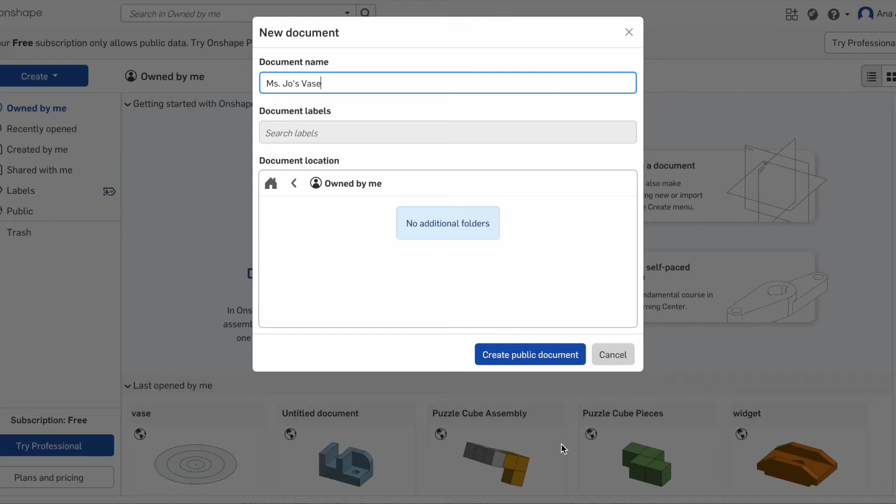Hello everyone, this is Miss Jo and we're going to make a vase using the Loft tool.

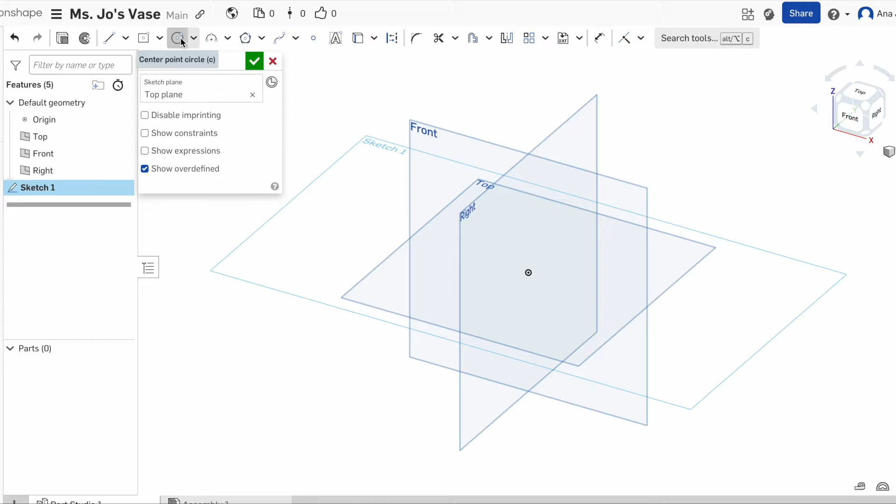So go ahead and start a new Onshape document and just call it my vase, and it'll open up your first little planes. Basically this is just going to be the same process over and over again. You're going to make a sketch on your top plane, and I'm going to start with a center point circle. I'm going to look at my top and make a circle. It looks great, and I'm going to check that off. I'm going to put it back in the isometric view.

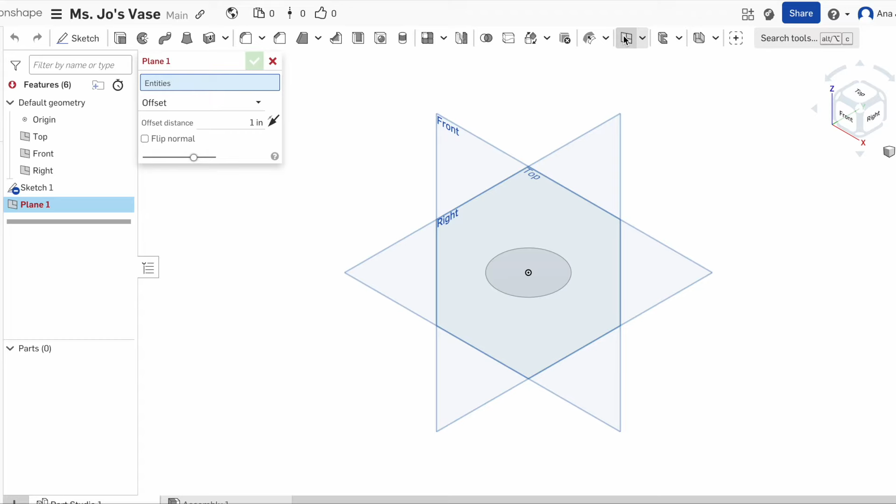So the next thing you have to do is make a plane that is offset, or above, this top plane. So you're going to look right here for the plane tool. You can click down, maybe it's not set, but it should default to the plane tool. When you do that, you're not going to see a green check mark until you tell it which plane you want to offset your plane from. So choose the top plane, and then here you can decide what distance you want.

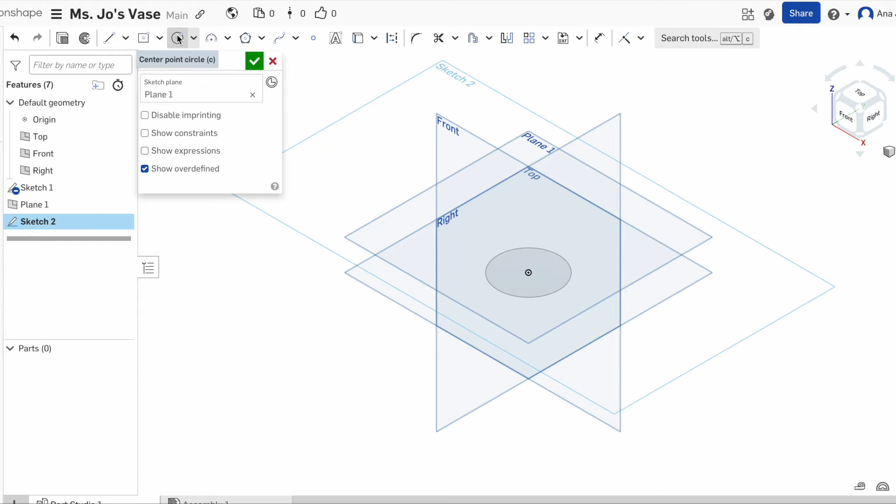I'm just going to make mine 1 inch above the top plane, and then I'm going to make a new sketch, and this new sketch is going to be on plane 1, and you can choose any shape. I'm just going to choose another center point circle. I'm going to look in my top view and make another circle, and this one I kind of want my vase to go a little out before it goes in. So I'm going to make a circle that's bigger than that. Click on the check mark. And if I look at this, you'll see that I have my 2 circles.

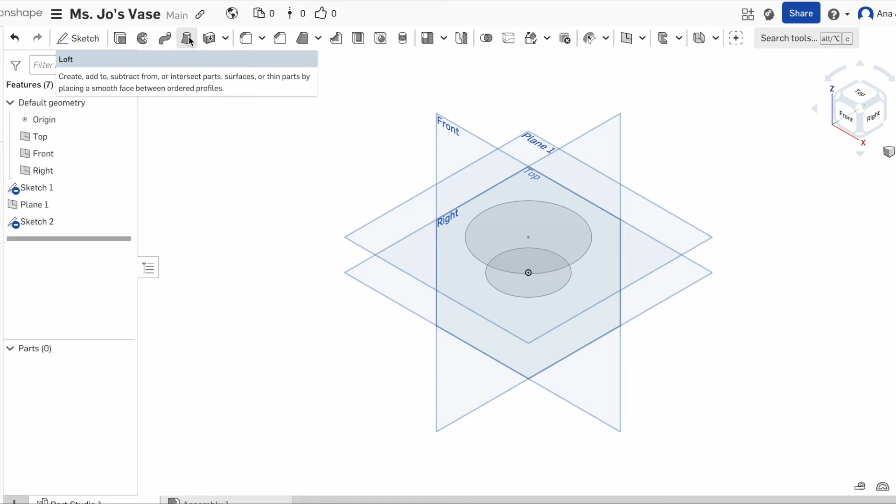So now is when we can use the Loft tool. The Loft tool is right here, and what it does is it will connect any 2 shapes. So I'm going to click that, and I'm going to first select my first circle and then my second circle, and you can see that it connects those 2 shapes. So that's the bottom part of my vase.

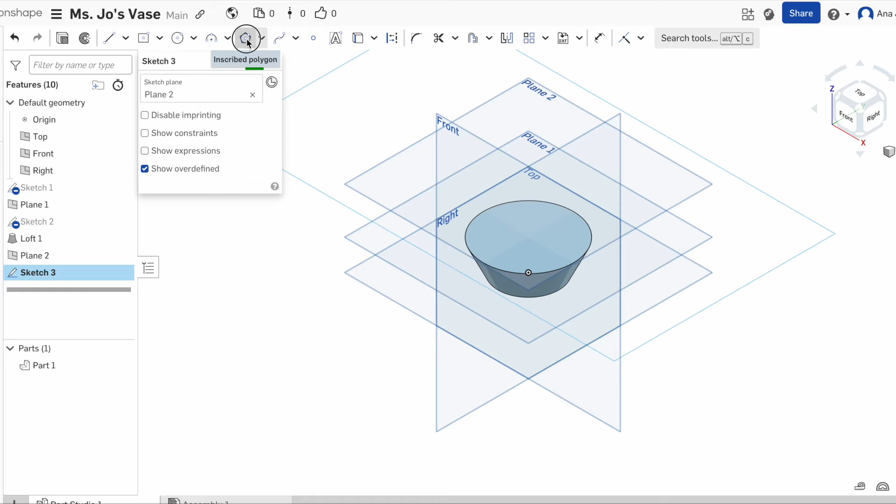Now I'm going to make another plane, and I want my plane to be above plane 1. I'm just going to do another inch and then press the check mark. This time I'm going to make a sketch, but now it's going to be on plane 2. I'm going to choose my inscribed polygon, and I look at the top view. I'm just going to make a polygon, make it smaller, and you can change the number. I'm going to make mine a hexagon with 6 sides, and then you press the check mark. Go back to the isometric view.

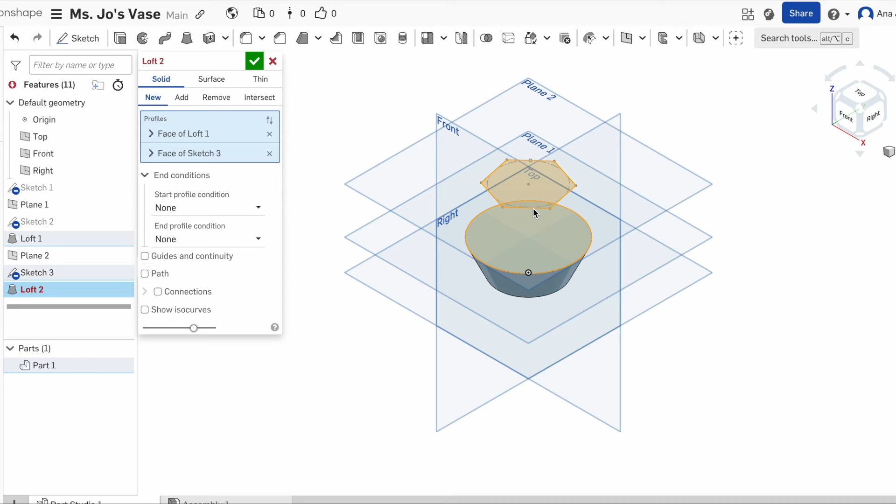Oops, not that one. Now I'm going to loft. You might think, oh, well, those aren't the same shape, how is it going to loft? But Onshape will loft them the best that they can. So it looks like that. I'm going to press the check mark.

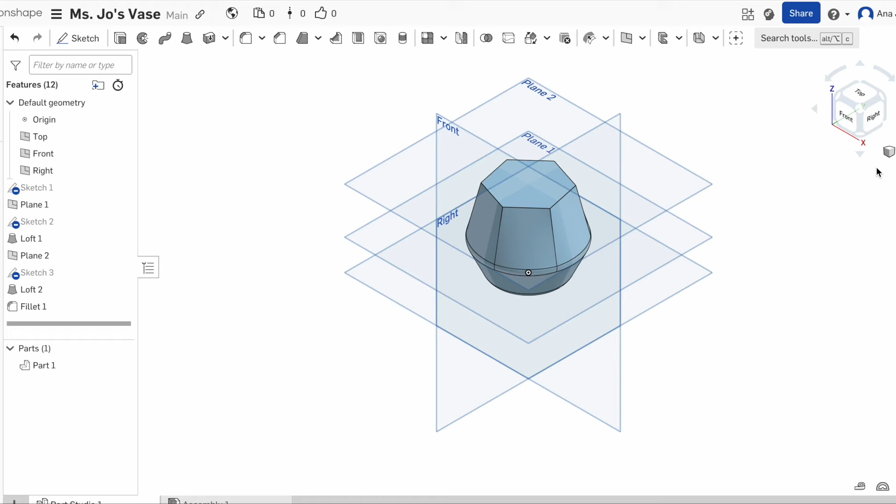Okay, so at this point, you can throw in some fillet tool if you want to have a curved side. You want to be sure that you are selecting the circle, and I'm going to fillet mine 0.25. It makes a nice little rounded edge right there. So that's the beginning of my vase. Okay, so then again, I'm going to create another plane, and it's going to be 1 inch above my second plane.

And I'm going to go ahead and this time make a sketch on that plane. I'm going to go back with the center point circle, and this time I'm going to make it a little bit smaller. It's going to be like the top of my vase. I'm going to press the check mark and then put it back in my isometric view.

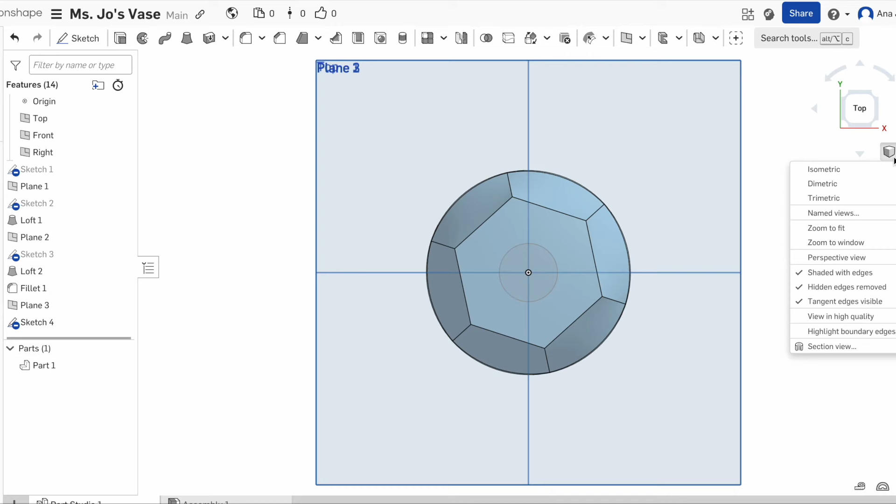And so then I want to use the Loft tool again and go ahead and click your two surfaces that you want to loft together. It's kind of looking like a pencil. Now, if you don't like the way that it looks, you can always go to the sketch that you made, like let's say I go to sketch 4, and I can change the diameter of that.

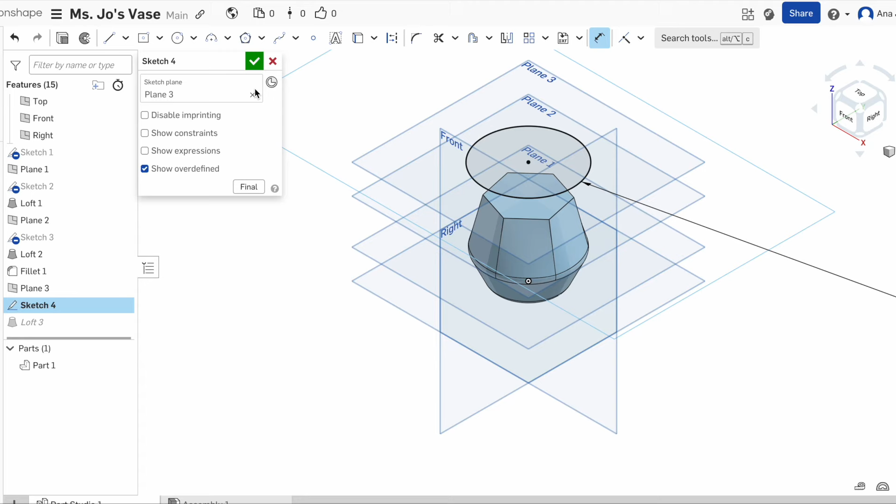So let's change it to 3, so it's really big. And then I press the check mark, and the loft will remain. I kind of like the way that looks a little bit better. And so I'm going to go ahead and give it 1 more layer. So I'm going to choose a new plane, and I think 1 inch is fine. And then remember, you have to select which plane you want it above and press the check mark.

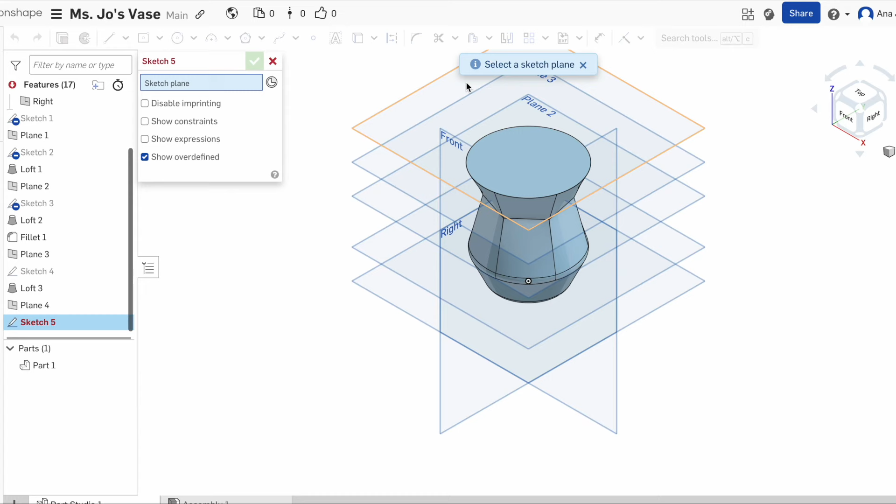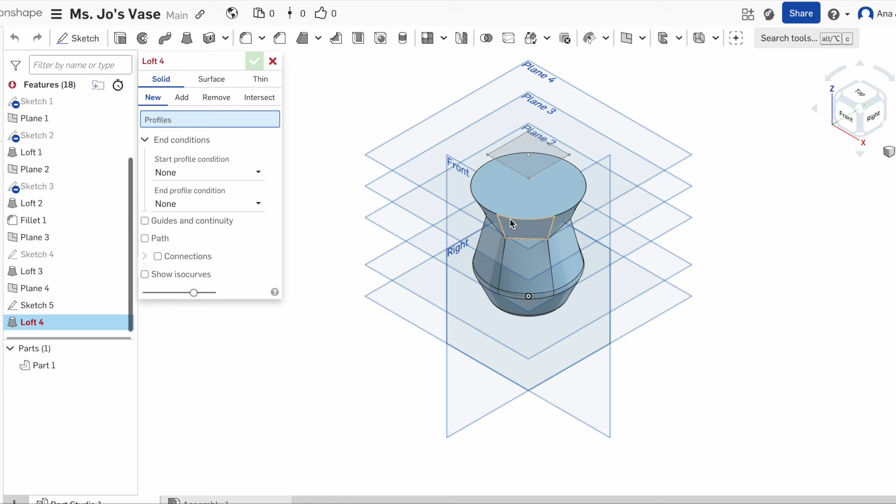I'm going to do my last shape as a center point square or a rectangle, and I'm going to make it a little bit smaller. And you can be really specific with your sizes if you want it to be definitely 1.5 by 1.5. You could do that. Press the check mark and look at the isometric view, and we'll click the Loft tool again, and we'll click that shape and that shape.

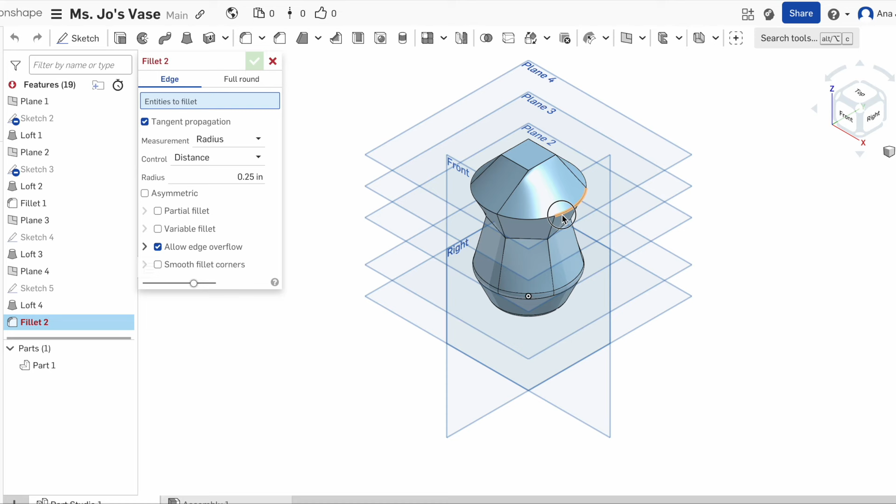And notice, because it was from a polygon, a pentagon, to a square, it does the best that it can in determining how you want those 2 things to be lofted together. Okay, that looks better. So the last thing you need to do is shell it out. Of course, you can fillet any of your surfaces, but you want to make sure that the whole surface is selected. Oh, that looks good. So it's nice and round.

So then you're going to press the shell, and then you're going to shell out the top face, and that will shell out the entire shape. And you might want to make it a little bit smaller, like 0.05, to make it a little bit thin. And if I look at the top, you'll see that it's actually hollow throughout the whole thing. It looks interesting to me. I kind of like it.

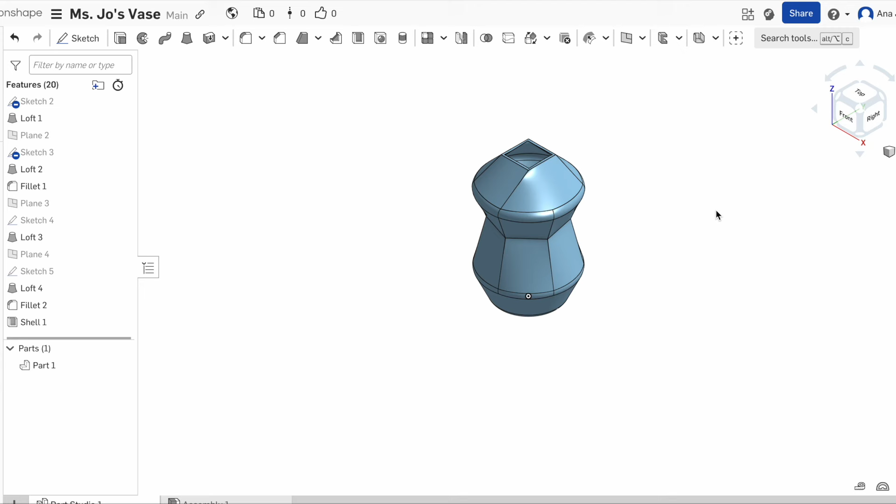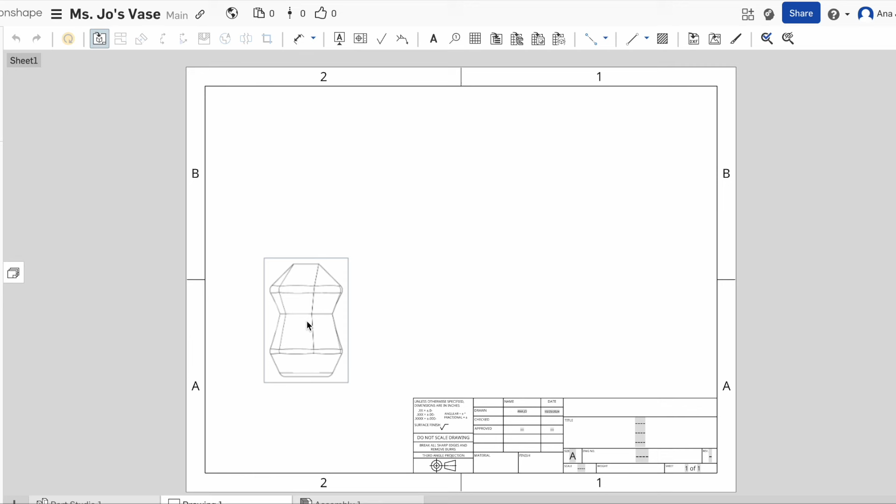So then, as always, you want to create an engineering drawing of your creations. So you're going to come down here and say create a drawing, press OK. And then first, you're going to select your part. I only have one part, and it's going to bring it in over here in the front view, and then click once, bring it over, and it will show the side view, and then bring it here, it'll show the top view, and then here, and it'll show the isometric view. So you have your isometric and then your 3 orthographic projections.

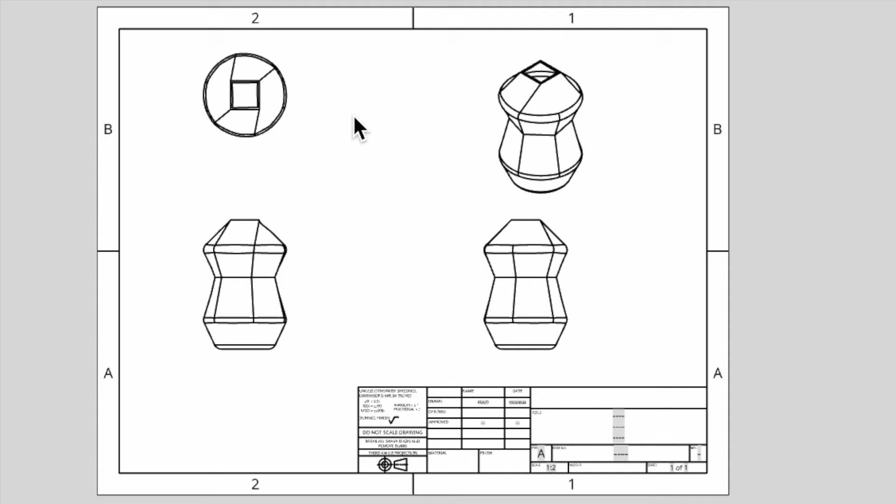So that looks great. But yeah, that's how you use the loft shape. And there's several different ways to make a vase. So we'll learn how to make one with the rotation tool next, but this is how you can do it with the loft tool. And now you know how to use the loft tool.